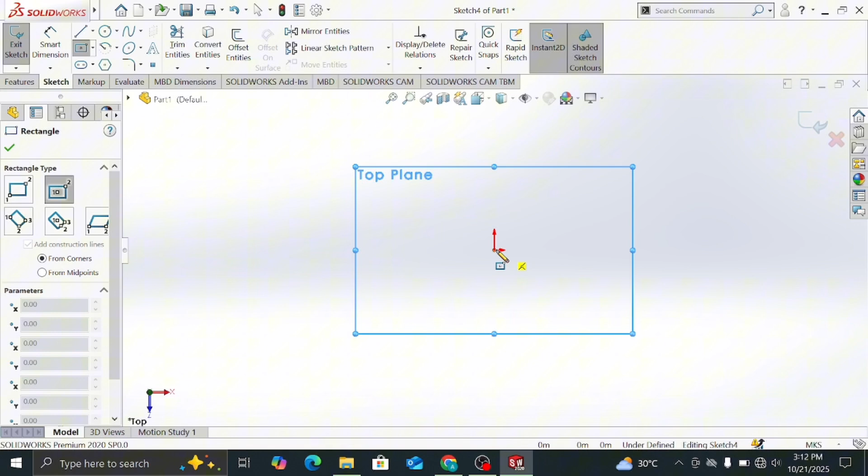Start by choosing the top plane and create a new sketch. Draw a rectangle on the top plane, add dimensions. The width is 1 meter and the length is 0.60.

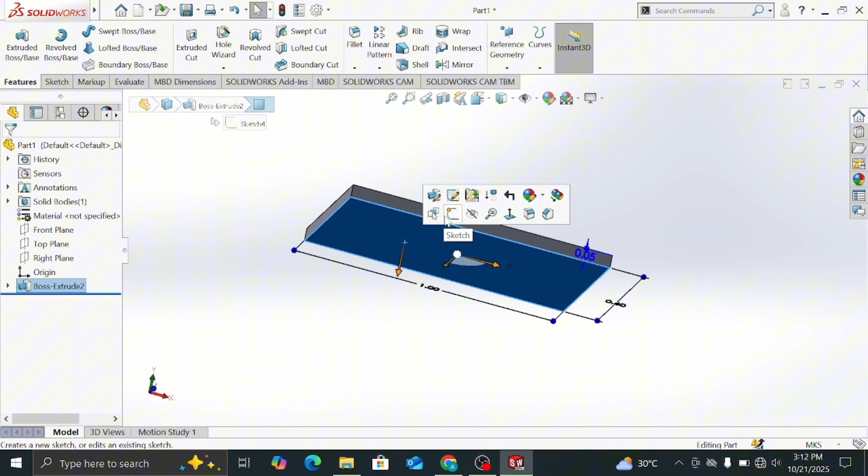Extrude the rectangle with a thickness of 0.05 meter to form the tabletop. You select the top surface of the table to create a new sketch. Draw a circle and provide the required dimensions.

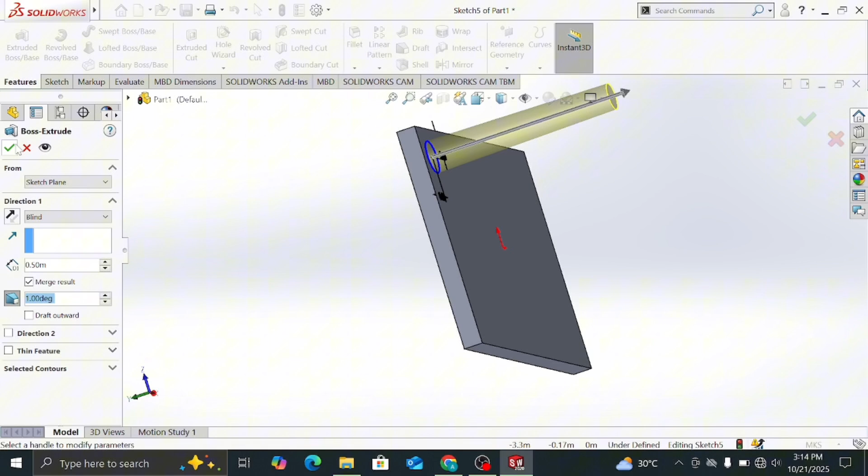Use the fillet feature to smooth or round the edges of the tabletop.

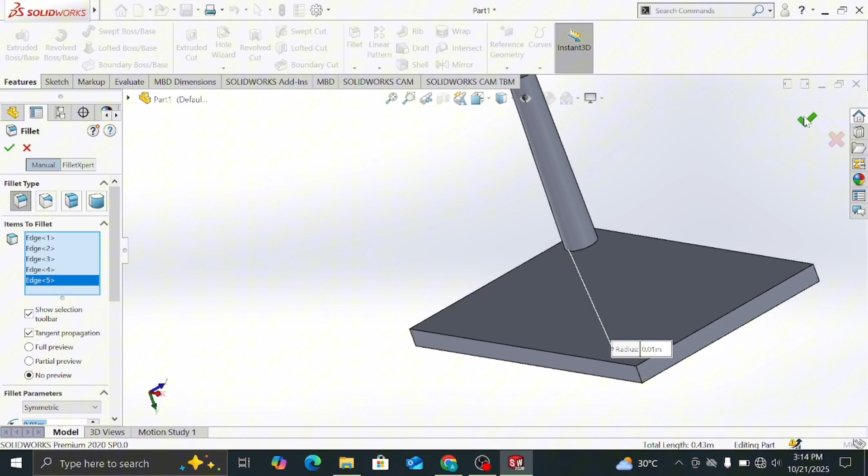Select the front plane, go to the Features tab, and click Mirror. Under Bodies to Mirror, choose the body you want to mirror and select the appropriate surface.

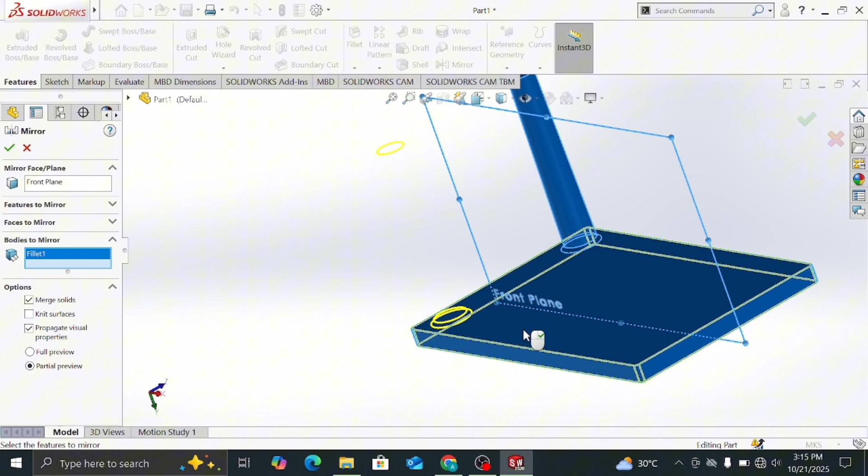Click Check to confirm. Repeat the same process, but this time select the right plane. Again, choose the body to mirror and confirm the operation. After mirroring using both planes, the table model is now complete.